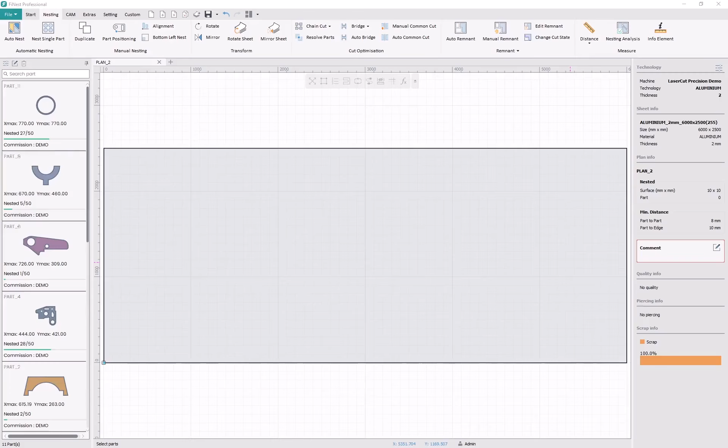Manual nesting gives you full control. Simply drag a part from the list onto the sheet to begin. Enter exact coordinates into the X and Y position fields for ultimate precision. You can also easily move the part to your desired position by dragging it with your mouse.

To unlock powerful placement options, first check the part's properties in the list. Ensure both rotate freely and mirror options are enabled, so you can rotate and mirror the part as needed.

Effortlessly create a mirrored version of your part. Simply select the part and press the M key, or use the dedicated mirroring tools.

Quickly find the perfect orientation for your parts. Just select any part and press the R key to instantly rotate it. This keyboard shortcut allows you to rapidly test different placements and fit parts together more efficiently.

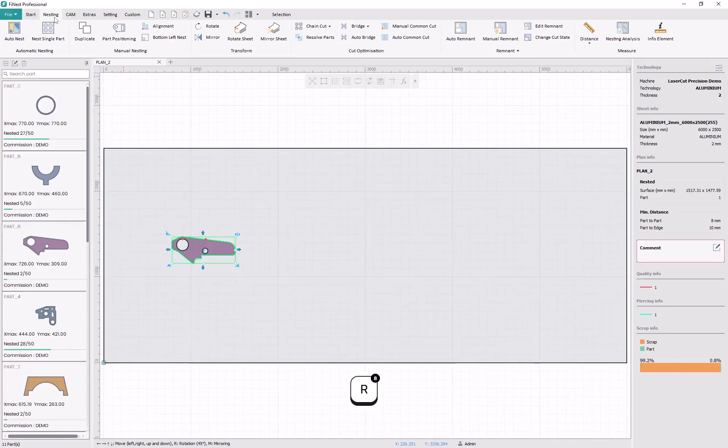If you need more precise control, access the Rotate menu to enter any custom angle, ensuring your part can fit perfectly into any tight or unconventional space on the sheet.

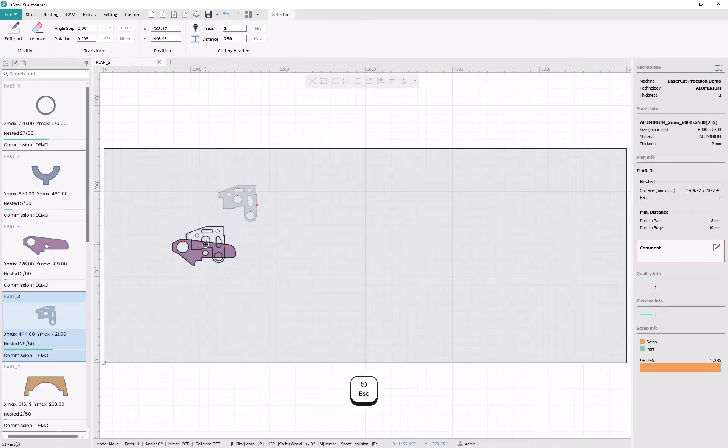To avoid accidental overlaps when placing parts close together, simply press the spacebar to turn on collision detection. You can also move the selected part using the keyboard arrow keys or on-screen move handles for fine-tuned positioning.

To quickly duplicate a part, press the Alt key, then drag it to a new location. You can use the same method to duplicate an entire group of parts.

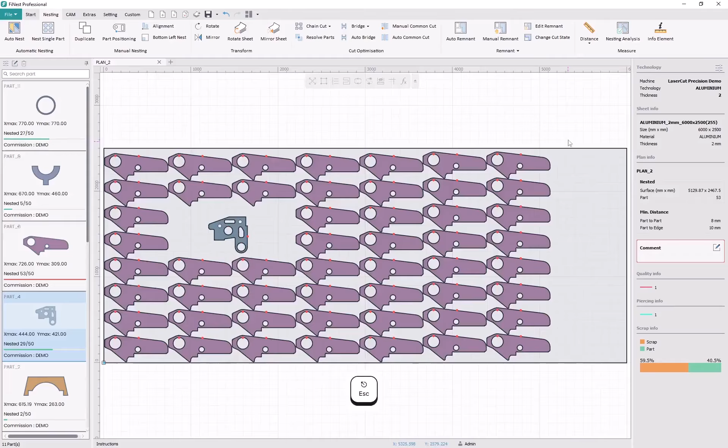To remove any unwanted parts, simply select them and press the Delete key. For more structured duplication, use the Duplicate tool. This allows you to create a specific number of copies with precise horizontal and vertical spacing.

For exact alignment, the Part Positioning tool is essential. Select a reference point, like top left, then click the part to instantly snap it into place relative to your cursor, making it easy to align with other parts or the sheet edge. This works for any reference point you choose.

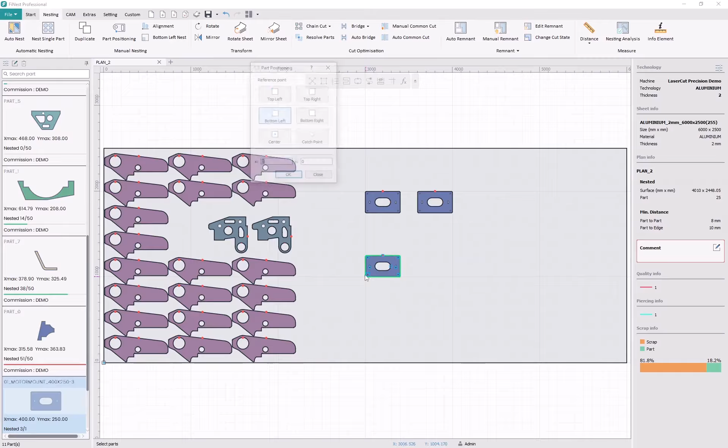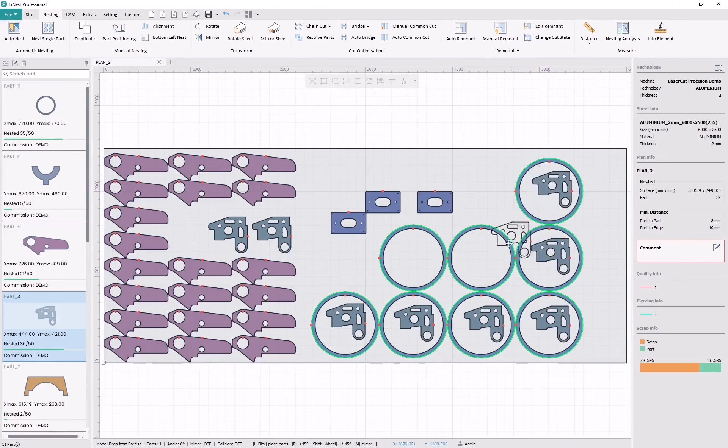Maximize your material efficiency and dramatically reduce waste by nesting smaller parts inside the cutouts of larger ones. This powerful technique ensures you use every possible area of the sheet.

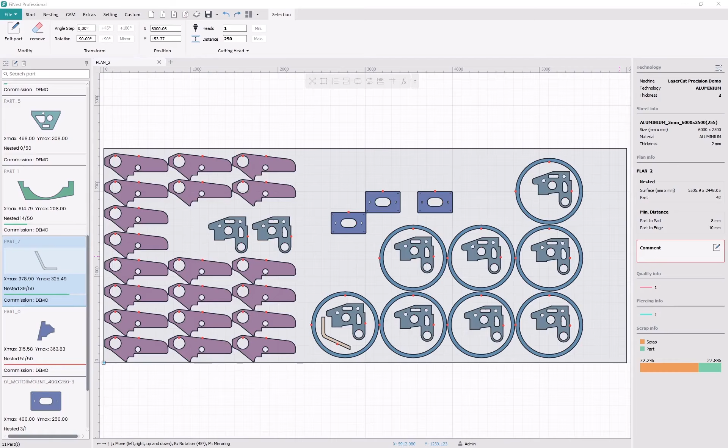As you can see, manual nesting provides the ultimate control over your part layout. By combining tools such as intuitive drag and drop, rotation, and duplication, along with other available features, you can create highly optimized nests that save time, dramatically reduce material waste, and maximize your profitability.